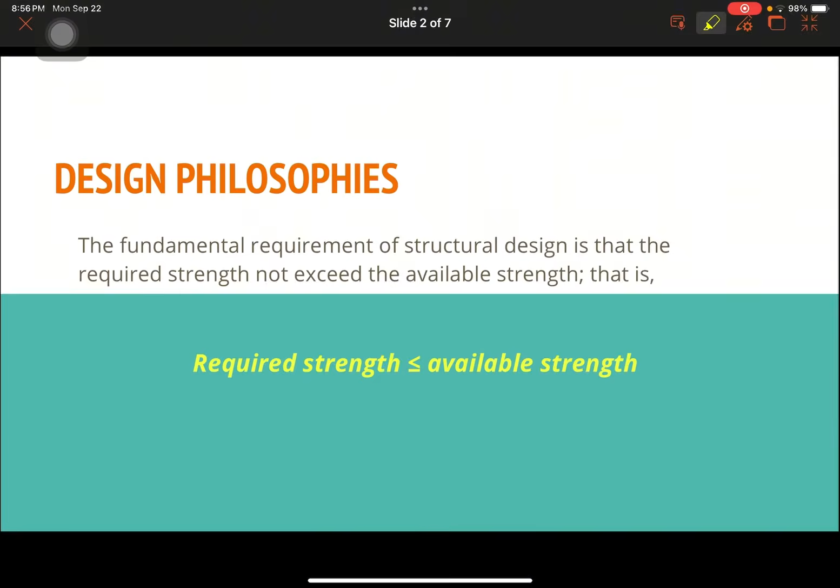So, let's go over them one by one, starting with allowable strength design or ASD. Historically, ito yung pinakaunang ginamit na design philosophies. After that, we'll move to LRFD, which is the more modern approach. So, ASD is called elastic or working stress design.

So, the main idea is simple. We make sure that the applied load effects like axial, bending, or shear do not exceed the allowable strength of the member. So the formula is: required strength is less than or equal to the allowable strength.

Now, paano kinukuha yung allowable strength? So allowable strength is equal to nominal strength over the safety factor. So basically, we reduce the material strength by dividing it with safety factor.

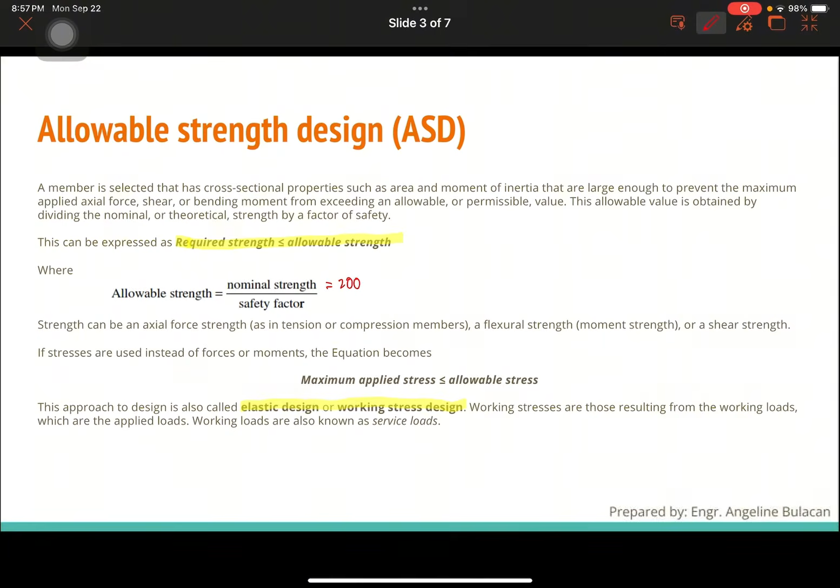So example, if a steel bar has a nominal strength niya is 200 kilonewton, and the safety factor is 2, then the allowable strength is only 100 kilonewton. So, even though kaya niya buhatin yung 200 kilonewton, we only allow 100 kilonewton to be safe.

Think of a plastic chair. Alam mo na kaya niyang buhatin ang 100 kilos, pero dahil gusto mong safe, you only allow 50 kilos. So that's ASD. You limit the strength that you allow in the design.

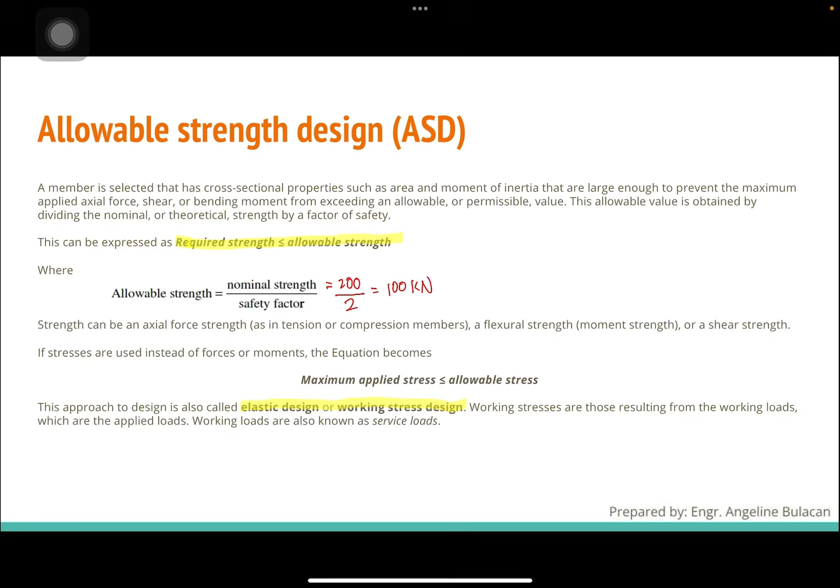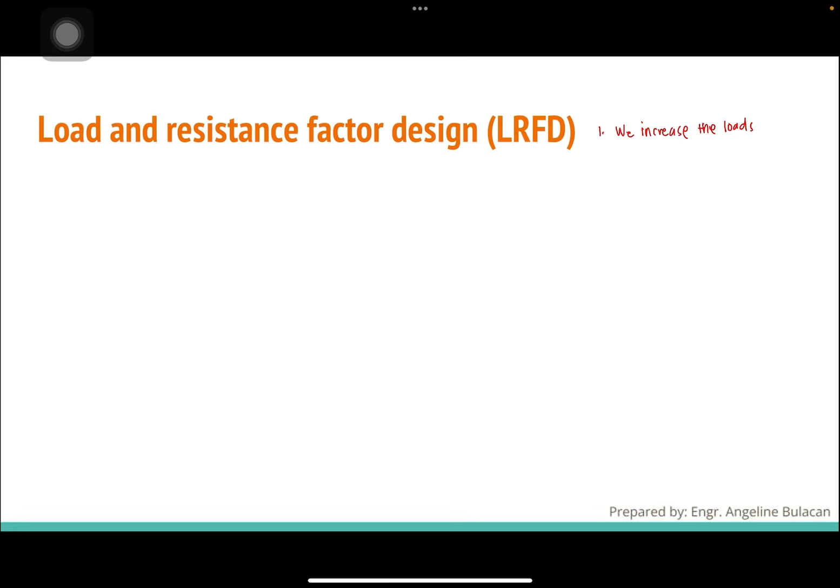Now, let's go to LRFD, which is more modern. The philosophy here is different. Instead of just reducing strength, we do two adjustments. One is we increase the loads using load factors. So, ito po yung binubuhat ng steel member mo.

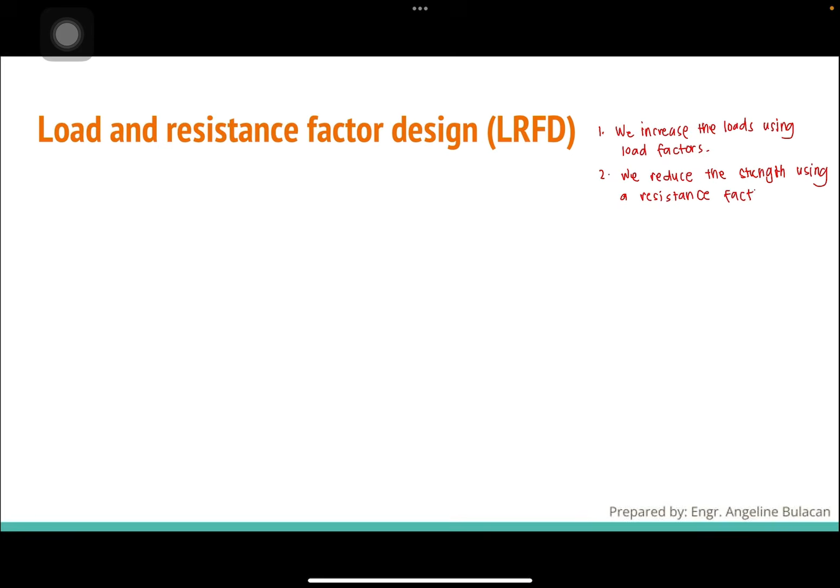Then, secondly, is we reduce the strength using a resistance factor, or siyang capacity ng structural member mo. So, the formula is: factored load is less than or equal to factored strength.

So, yung factored load po, kailangan nga i-increase yung factored load using ng load factors. So, service load times load factor. While yung factored strength mo naman is equal to nominal strength times the resistance factor.

So, example. Meron tayong service load, is equal to 10 kilonewton. Pero sa totoong buhay, minsan mas mabigat ang actual load kaysa sa design assumption. Kaya sa LRFD, we say, okay, let's assume mas mabigat siya, multiply by 1.5.

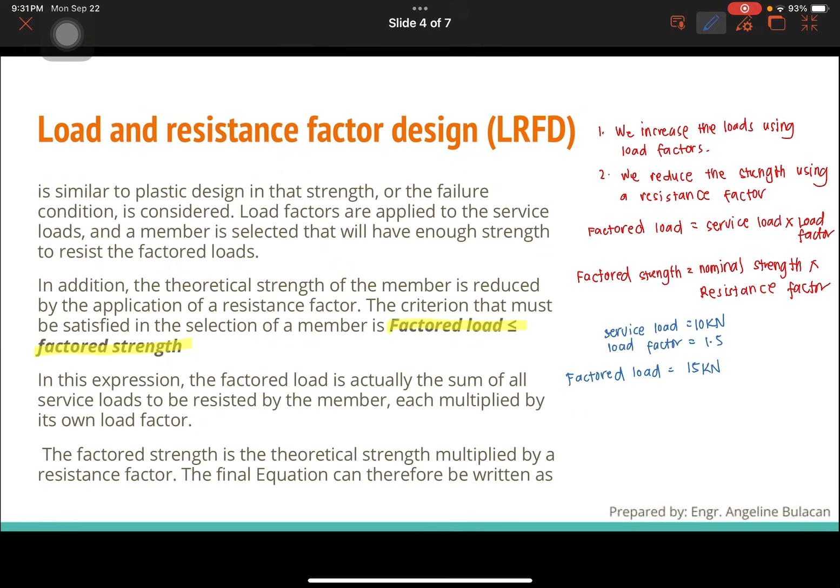Next, example yung structure mo, merong nominal strength na 20 kilonewton. Pero sa totoong buhay, baka hindi siya umabot sa full 20 kilonewton dahil sa defects, error sa construction o natural variability. Kaya sa LRFD, we say, okay, let's assume weaker siya. So, multiply by resistance factor equals to 0.9. Yung 0.9 po, siniset po yan ng NSCP na multiplier.

Kaya, yung magiging factored strength natin is equal to 18 kilonewton. So, 20 times 0.9 is 18 kilonewton. So, yung logic dito, we are assuming the material is not as strong as its theoretical maximum.

Now, we compare factored load versus factored strength. So, the factored load is 15, then the factored strength is 18. So, 15 is less than 18. So, therefore, yung structure mo is safe. Hindi siya babagsak kasi kahit na minagnify natin yung loadings na kakargahin ng structure mo, yung structure mo, theoretically, binaba mo yung capacity niya, kaya niya pa rin buhatin yung loadings. So, safe pa rin siya at hindi babagsak.

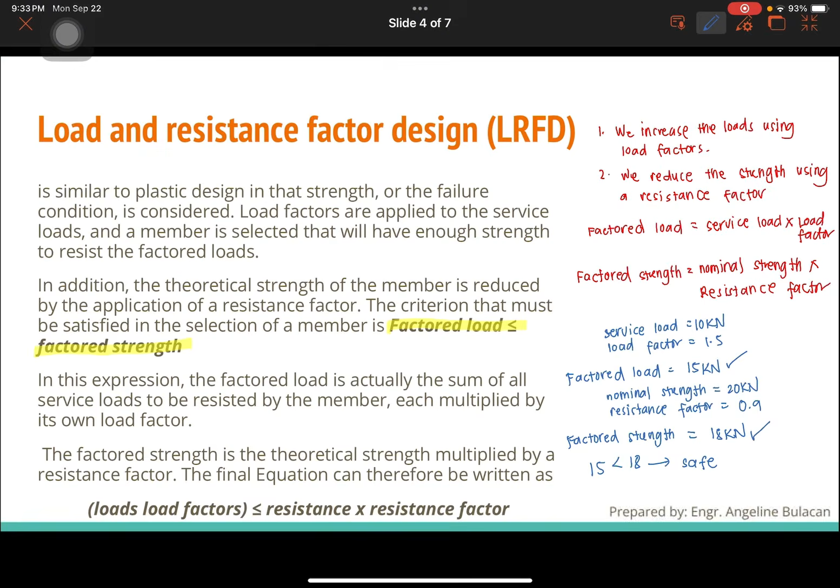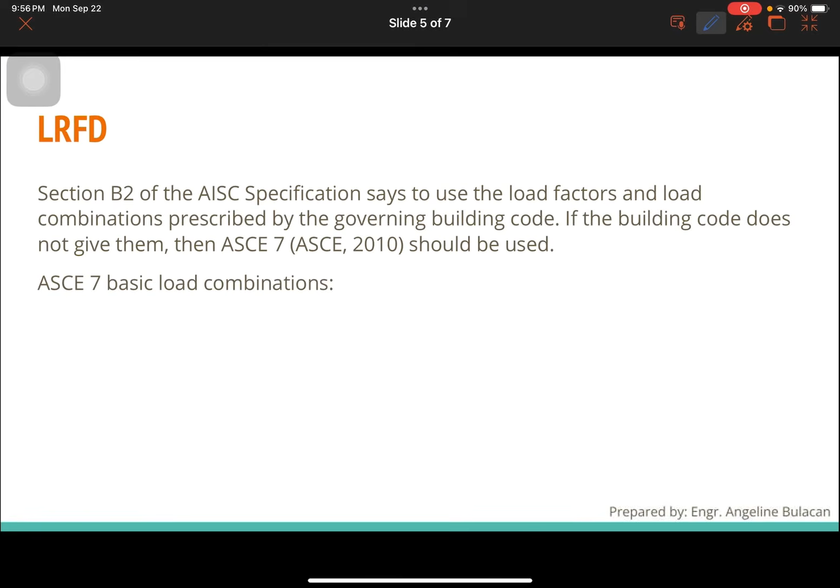The LRFD method uses load combinations prescribed by building codes. So, if there's no local code, the ASCE 7 standard is used. Each combination considers different possible scenarios like a mix of dead load, live load, wind, or seismic load, and applies different load factors accordingly to cover uncertainties.

So, sabi ko nga, class, gumagamit ng load factor para ma-magnify yung service load. So, pagka yung service load minultiply sa load factor, mag-result yun sa factored load natin. So, ito po yung iba-ibang load factor. So, sa combination 1, ang multiplier natin is 1.4 pagka dead load lang ang present, no?

Then, kung meron ng iba-ibang loadings, gaya ng dead load, meron ding live load due to occupancy, or L sub R or the roof live load. So, pwede mong gamitin is yung combination 2 or combination 3, as long as present yung mga loadings dun sa formula. So, kung alin dun sa tatlo yung makakapagbigay ng mataas na sagot or load combinations, yun yung gagamitin mo.

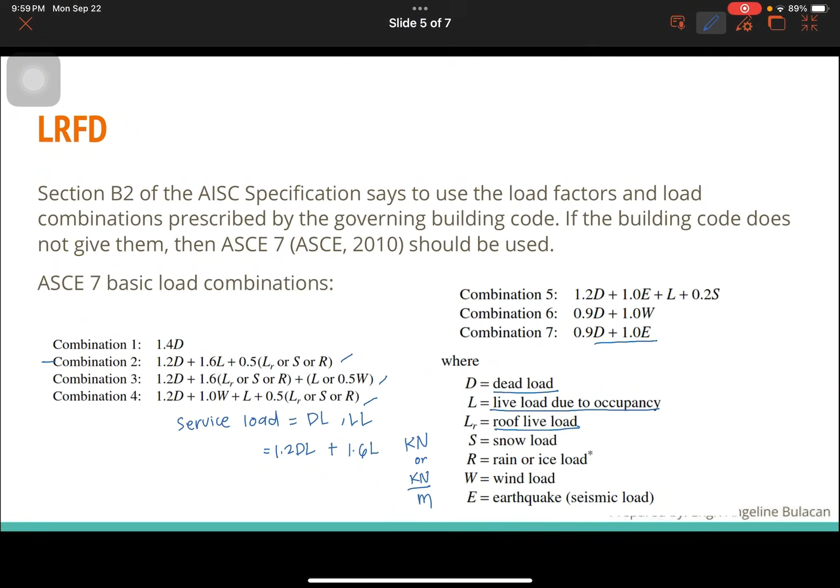Yung dead load at saka live load dyan, pwede yung unit nila naka kilonewton pagka concentrated load, o kilonewton per meter pag yung loadings na given is naka uniformly distributed load. So depende po, kilonewton or kilonewton per meter sa mga uniformly distributed load.

Then, safety factors and load combinations for ASD naman. So ito yung formula. Pagka sinabing R sub A, so yan po yung gamit na variable. Pero sa mga problems natin, ang ginagamit nating variable para sa required strength is P sub A na naka-kilonewton, is less than or equal to P sub n over omega.

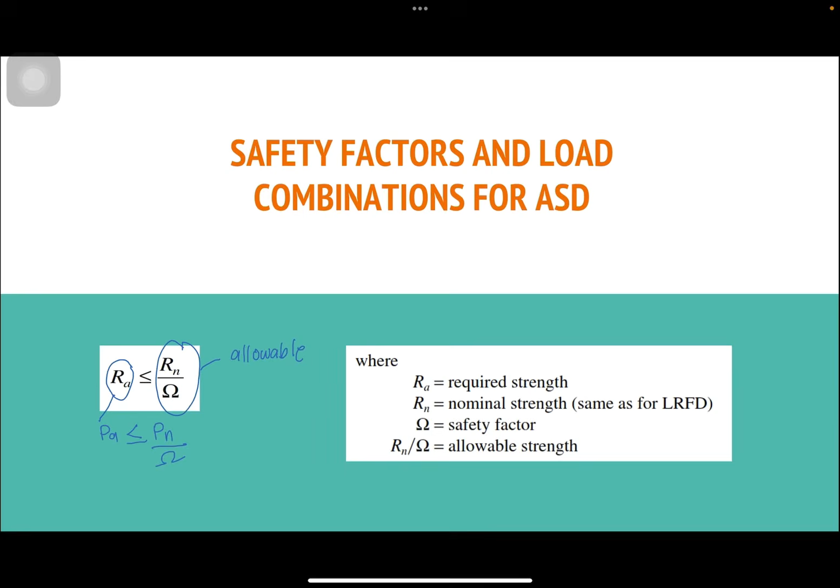So sa ASD, madali lang kasi kailangan lang nating i-reduce yung nominal strength ng material by dividing it by the safety factor omega. So yung R sub A natin is the required strength, then yung R sub N is the nominal strength, same as for LRFD, over the safety factor omega. Therefore, ito po yung tinatawag nating allowable strength na nabanggit ko earlier.

For ASD naman, on the other hand, ASD also uses combinations of service loads but without the load factors seen in LRFD. So it still considers various load cases and ensures that under all possible service conditions, the structure stays within the allowable strength. So these combinations also follow the ASCE 7 standard and are compiled in the AISC Steel Construction Manual. Tingnan nyo na lang po yung combination para sa ASD.

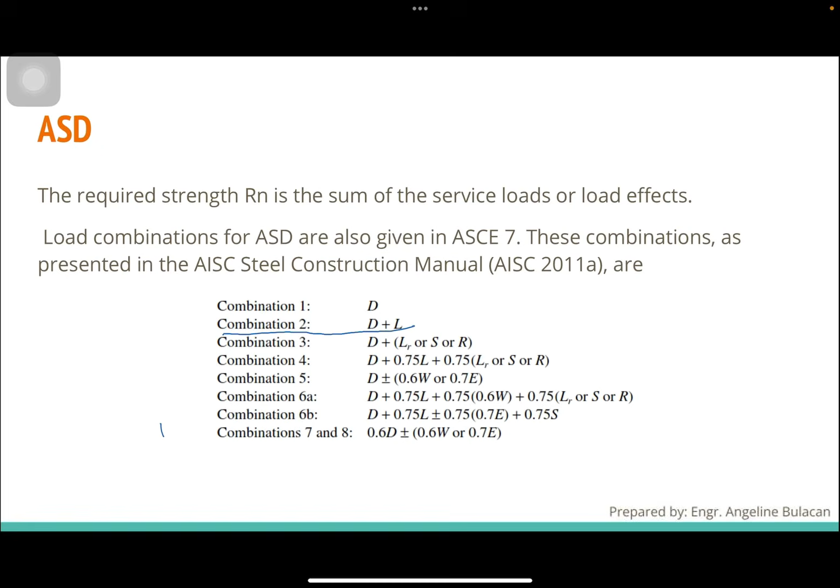Pero malamang sa malamang, laging ginagamit dito yung combination 2. So wala pong multiplier dyan, kasi magkaiba siya dun sa LRFD, which is yung loadings minamagnify. Dito as is, o yung service load yung ginagamit. Hi class, today we're going to talk about tension members in steel design.

These are structural elements subjected to axial tensile forces. Ibig sabihin, hinahatak sila, hindi tinutulak. Common examples include truss members, bracing in buildings and bridges, and cables in suspension or cable-stayed bridges. Unlike compression members such as columns na nagba-buckle, tension members usually fail by rupture or yielding. Kaya ang design natin focuses on checking their net area and effective strength.

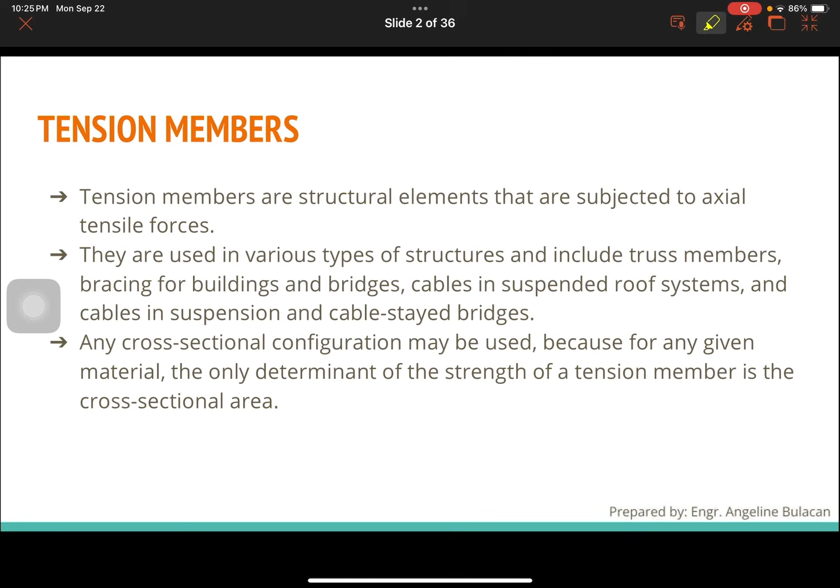Let's define first tension members. Tension members are any structural elements na humahawak ng forces na puro pulling action. For example, the diagonal members of a truss bridge or the cables in a suspension bridge. Ang lakas ng tension members ay largely dependent on its cross-sectional area, so the bigger the area, the more load it can carry. Pero hindi lahat ng tension members safe forever. Let's look at the possible failure modes.

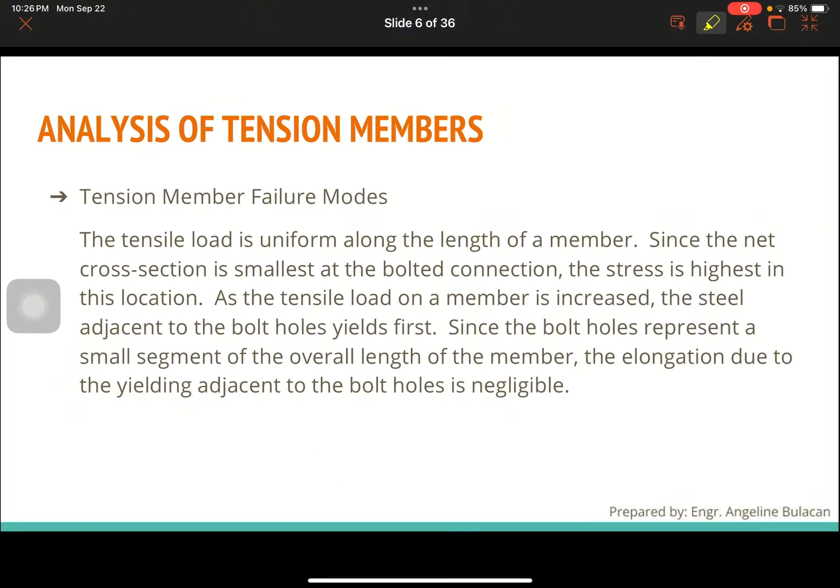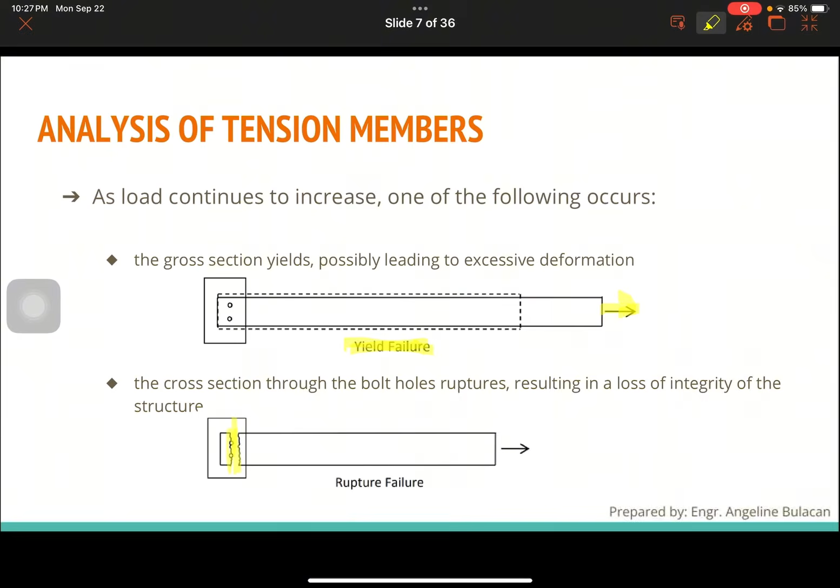Then we have the block shear. Sa block shear naman, ang failure na ito kadalasan nangyayari kapag nakahilera ang mga bolts o tornilyo. As per the description ng figure, it's stated that the cross-section through the bolt holes fail in a combination of shear and tension. So shear na sinasabi dyan is yung parallel dito sa tensile force natin. While on the other hand, yung tension is happening perpendicular from the direction ng tensile force.

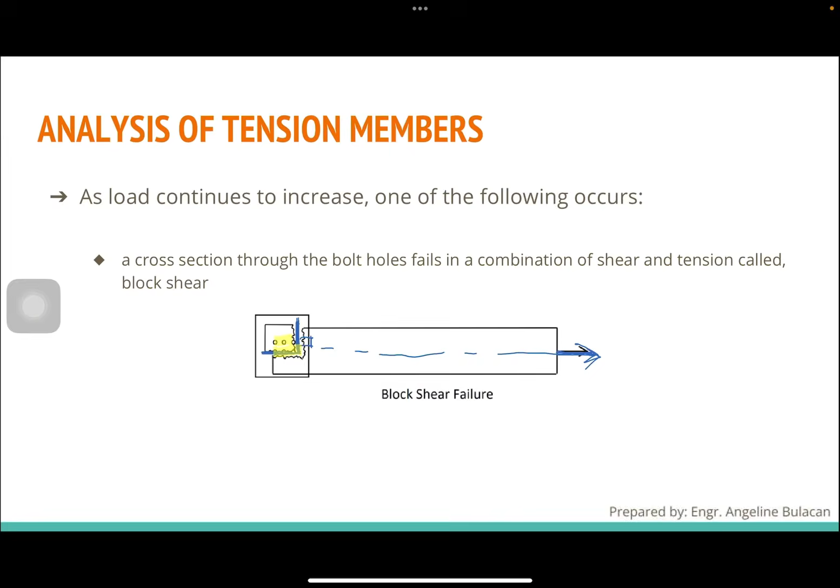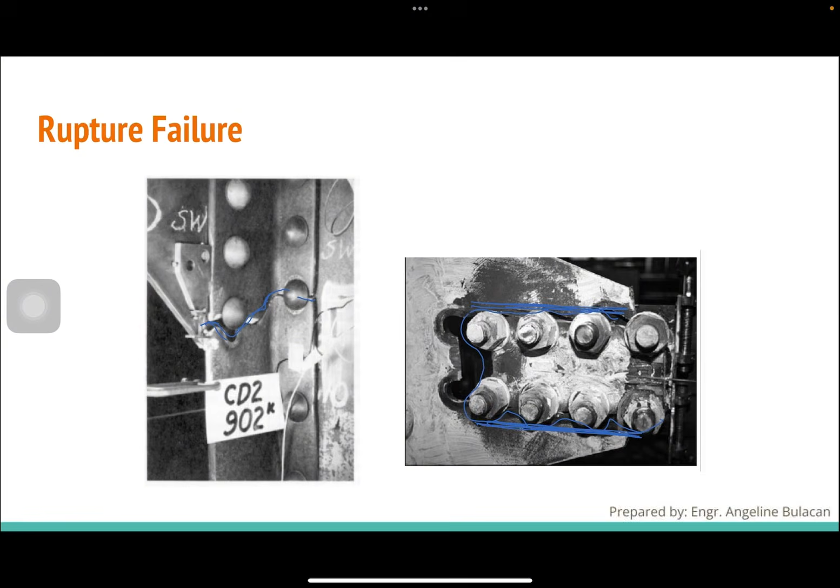Para may idea kayo kung ano yung itsura ng block shear sa real life situation o sa mga steel member natin, ito yung nangyayaring failure. Sa una, meron tayong rupture, napunit talaga yung steel member mo dun sa bandang kung saan located yung mga tornilyo o yung bolts natin, kasi maliit lang kasi dyan yung area o yung tinatawag nating net area. Samantala, dito naman po yung block shear, combination siya ng shear and the tensile. Ito yung shear, yung parallel dun sa direction ng force mo. Then yung tensile o tension naman, perpendicular siya dun sa line of action ng force mo.

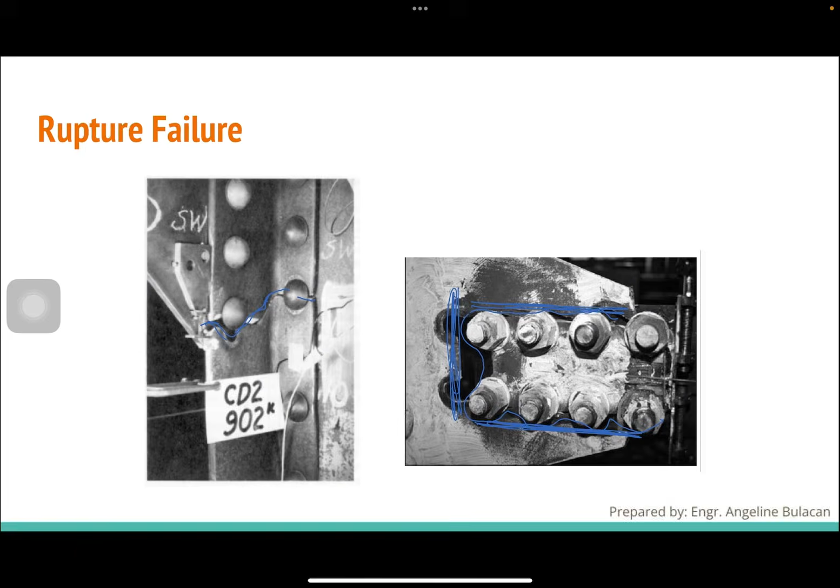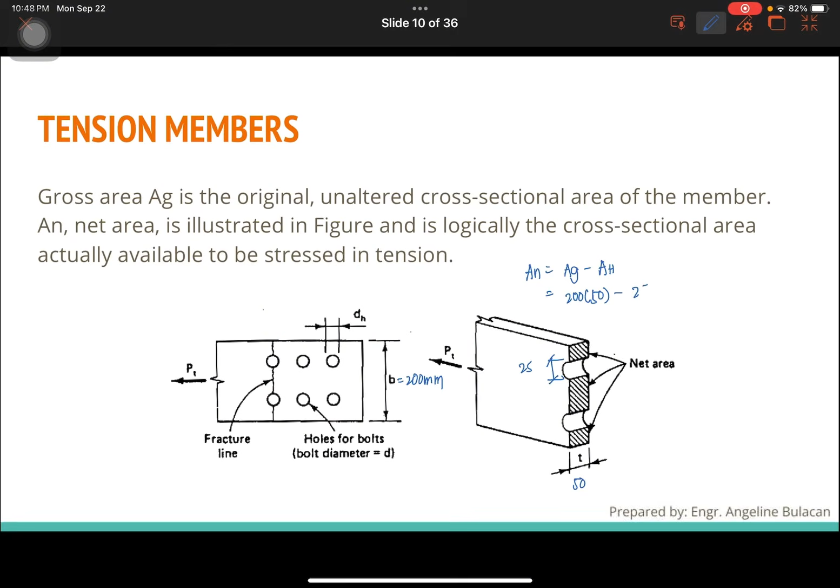Here, I want to emphasize the net area. Net area is equal to area gross minus area hole. Let's say we have the dimension of the plate, 50 by 200 mm. Para makompute natin yung net area, yung area gross na 200 times 50 kasi rectangular lang naman yung cross-section ng plate natin. Then subtract mo yung area ng hole. Let's say yung diameter na given is 25, so 25 times yung thickness, para maging area siya, which is 50.

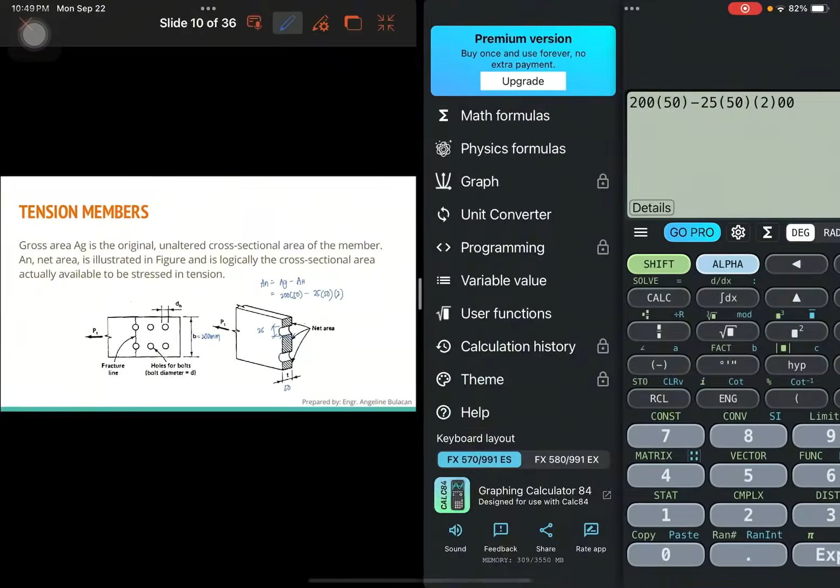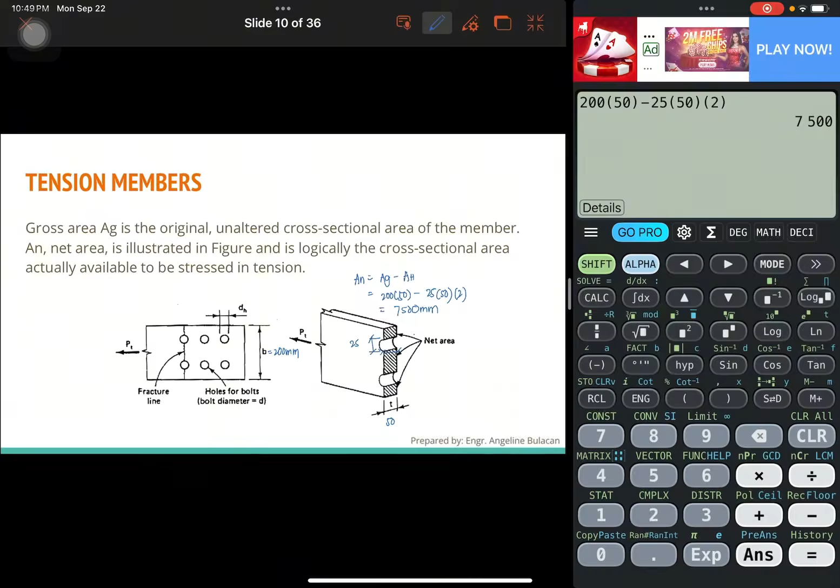So, 25 times 50. Makikita mo na dalawang hole, so times 2 ka. Therefore, yung makukompute nating net area sa example is 7,500 mm. Yan po yung net area na ginagamit natin para makompute yung strength pagka na-encounter natin yung rupture na failure.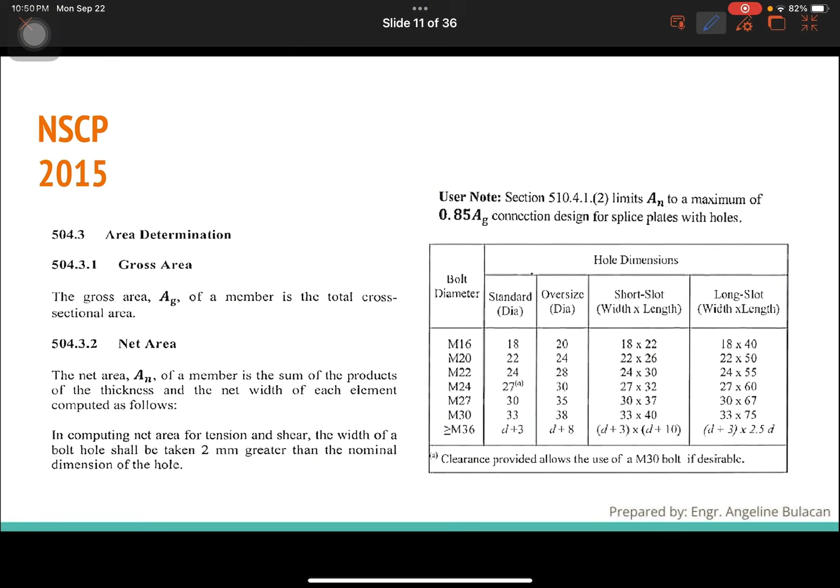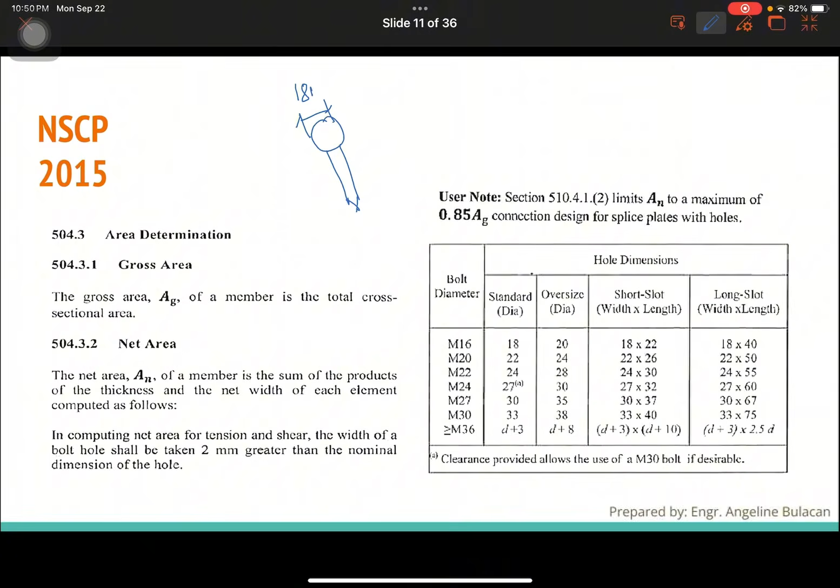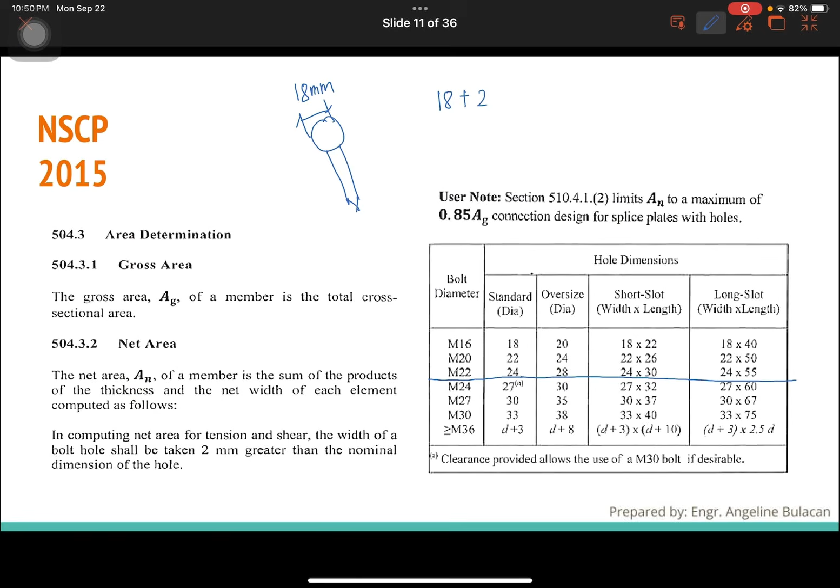So sa provision, example, we have bolt na merong diameter na 18 mm. Para makompute mo yung net area, gamit yung given na bolt diameter, hindi siya yung butas dun sa plate. Ang gagawin mo, mag-a-add ka ng 2 mm. Dito sa provision ng NSCP, pag less than 24 yung diameter ng bolt, 2 mm yung ina-add para makompute mo yung standard dimension ng hole. So equals to 20 mm.

Yan pa lang yung nominal dimension ng hole. Para makompute yung AN, kailangan yung area ng hole. Nag-a-add pa tayo ng 2 para dun sa safety factor, so 18 plus 2, dito magpa-plus ka pa ng 2. So all in all, yung dimension ng hole is magiging 22 mm. Ito po yung minomultiply mo dun sa thickness, let's say example 50, example lang yan. Pero kung lumampas na or equal siya sa 24 mm yung diameter ng bolt mo, ang ina-add na po dyan is 3.

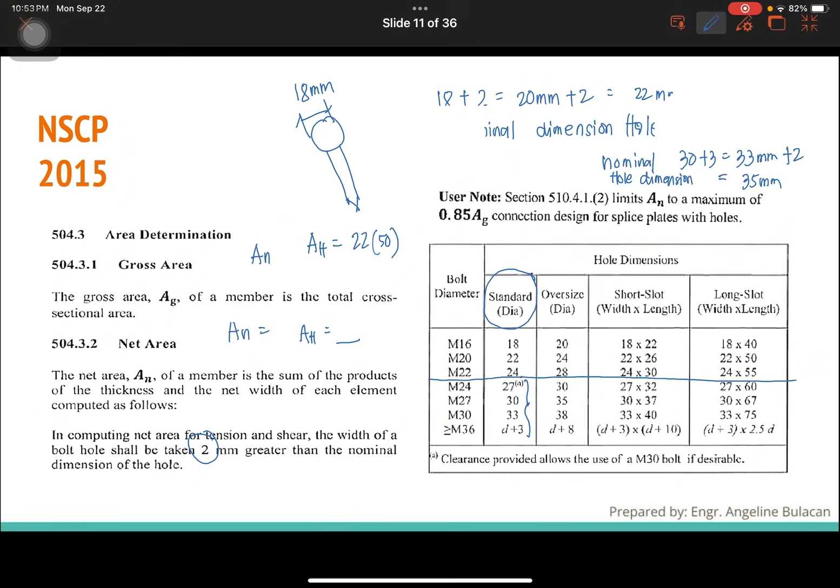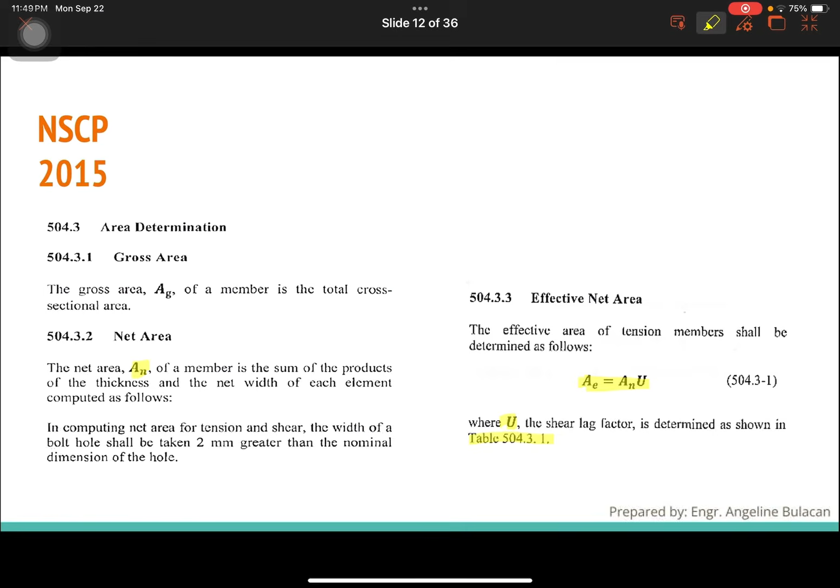The code states that the effective net area of tension members AE is equal to AN times U. Magkaiba po ang effective area sa net area. Ang importante dito, yung value ng U, according to table 504.3.1, define niya yung shear lag factors for connection. However, the general formula for U, which is nakalagay sa case 2, U is equal to 1 minus X bar over L, na makikita din sa case 5 at case 6.

To better understand it, let's define first what is shear lag. Shear lag ay ang hindi sabay-sabay na paghila ng buong cross-section ng isang bakal. Kapag ang tension force ay hindi pantay ang pagkakabit, hindi lahat ng bahagi ng bakal ay nakakaramdam ng pwersa, kaya may mga parte na late sumasama sa paghila.

Isipin mo itong example na angle, yung isang leg niya nakakabit using the bolt connection. Kapag hinila mo ito, meron kang tension force, hinila yung angle bar mo. Yung gilid ng bolt, ang una nahihila ito, yung magkabilang dulo ay delayed o hindi agad nahihila. So ang result nito, hindi buo ang lakas na naipapasa sa buong section.

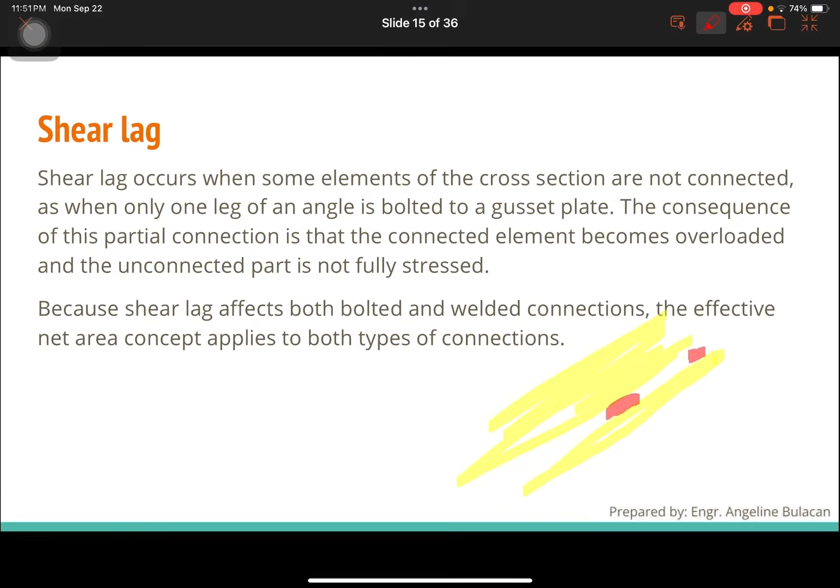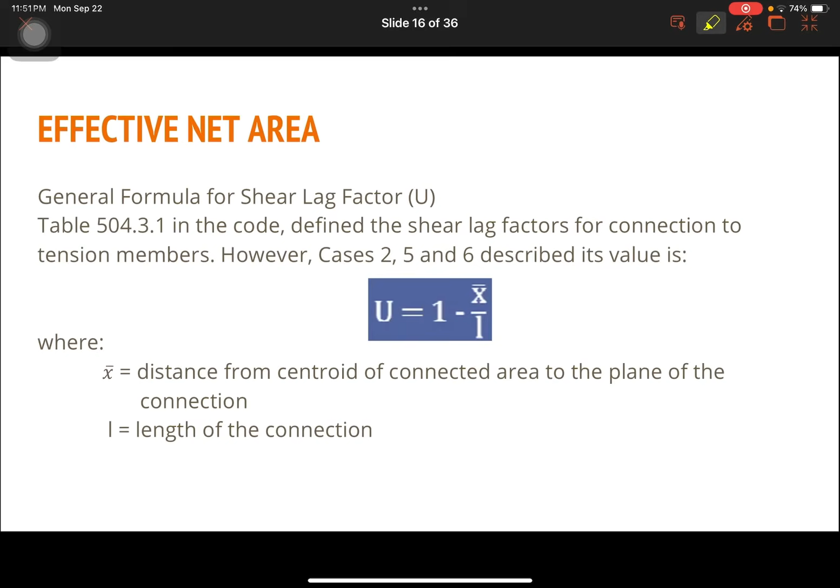Ang effect nito ay bumababa ang effective area, kaya kailangan na ito i-adjust sa design. Kaya ginagamit natin yung table para makuha yung U or shear lag factor, ito po yung general formula. Sa case 2, yun talaga yung gamit na gamit kasi ito yung pinaka-general. Samantala sa case 5, ginagamit siya pagka yung section mo is hollow circular cross-section. Then sa case 6, pag hollow rectangular section.

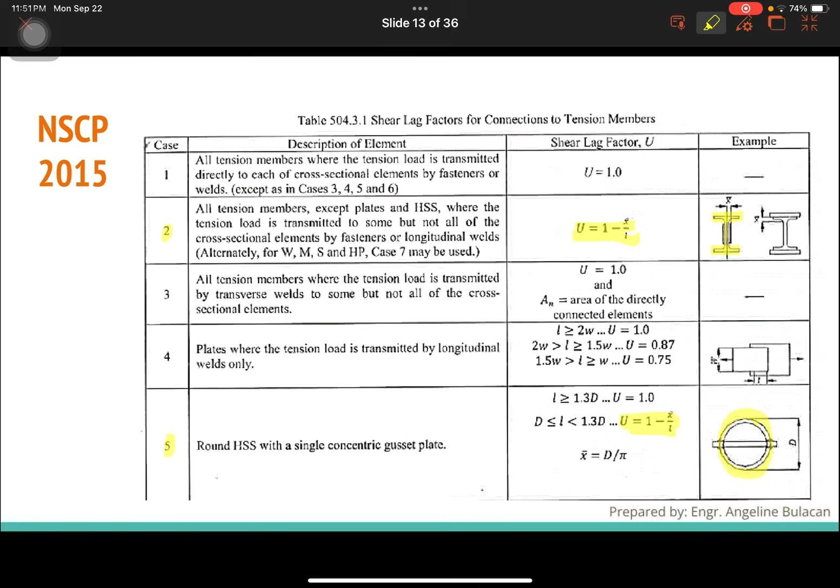Pero sa case 2, ito yung cross-section mo, example is wide flange or S-shape.

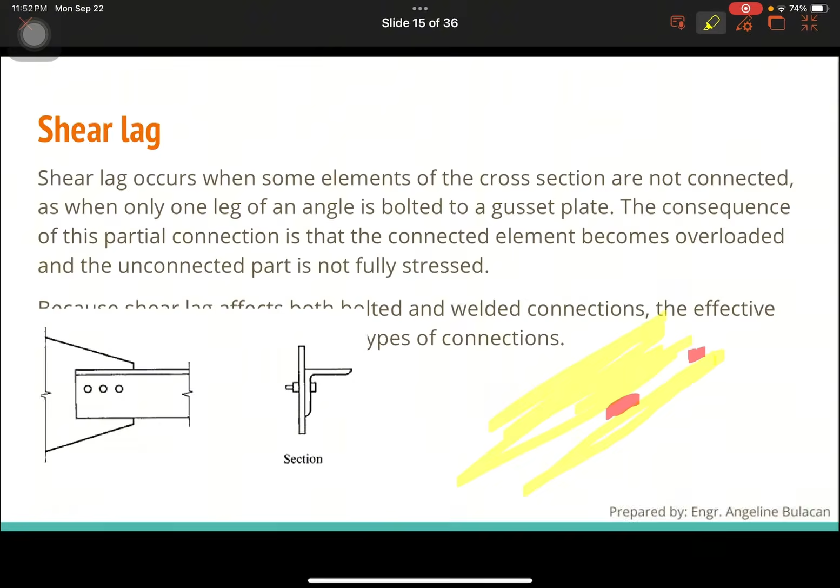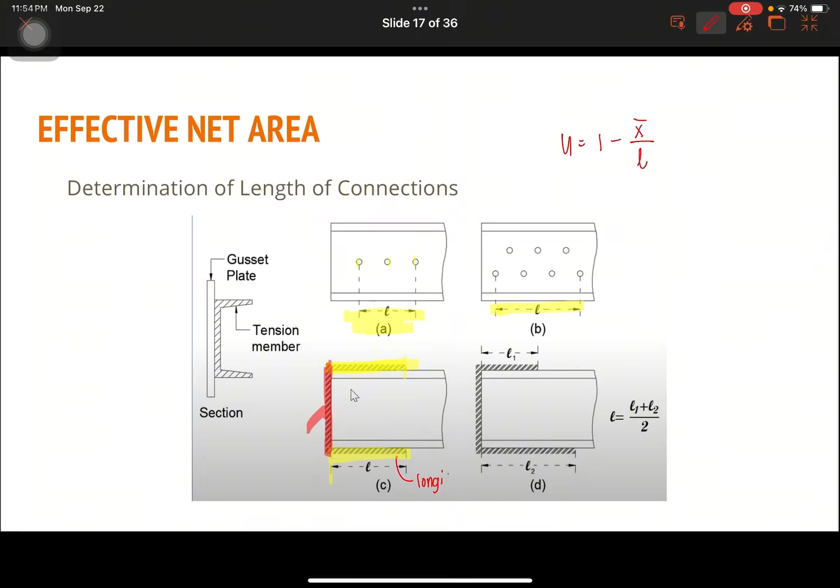Pagka hele-helera naman yung bolt mo, example yung figure B, ang pipiliin mong L is yung pinakamahaba na outermost end-to-end or center-to-center distance ng outermost bolt. Then kung by means of weld naman yung connection mo, yung L dito, kung magkapareho yung longitudinal length, tawag dito is longitudinal length. Then pagka vertical, that is the transverse welds. Longitudinal weld siya, ibig sabihin parallel siya dun sa direction ng tension force.

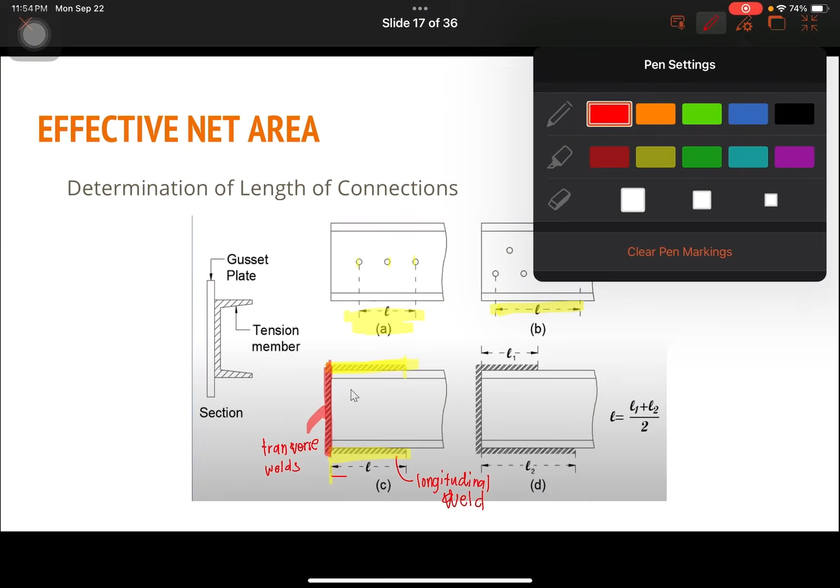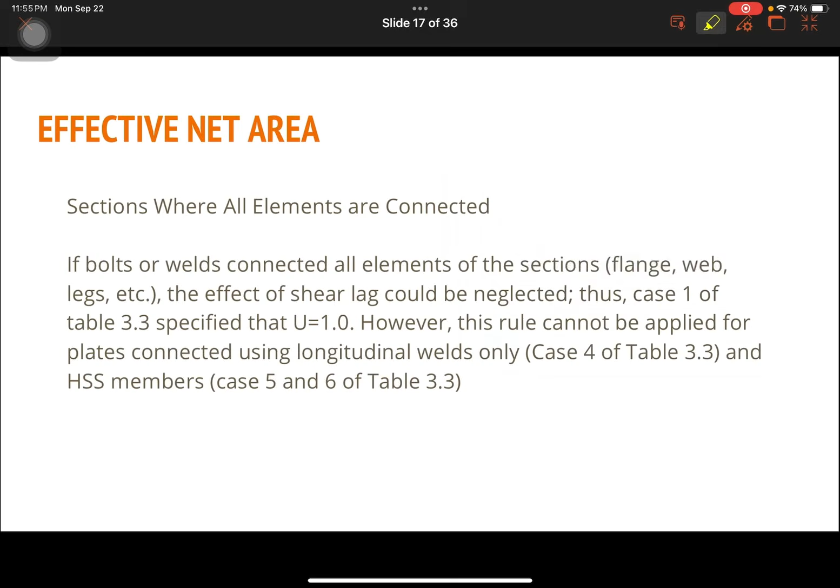Then ito naman, ito is the transverse, this is the transverse welds. Kung yung longitudinal welds mo is pareho yung haba niya, isa lang yung L. Pero in case na yung length ng dalawang longitudinal welds, magkaiba yung haba, kukunin mo lang yung average nung dalawa, so yun na yung magiging L.